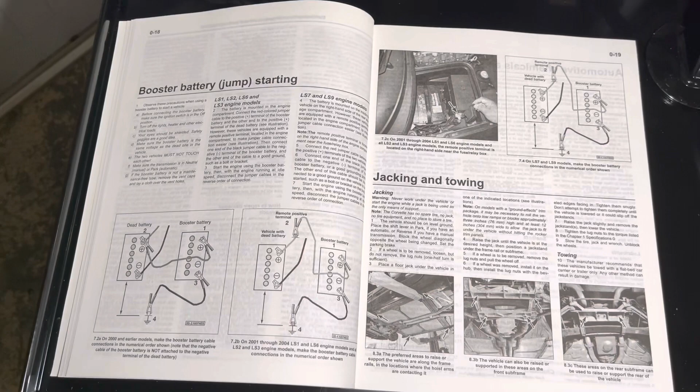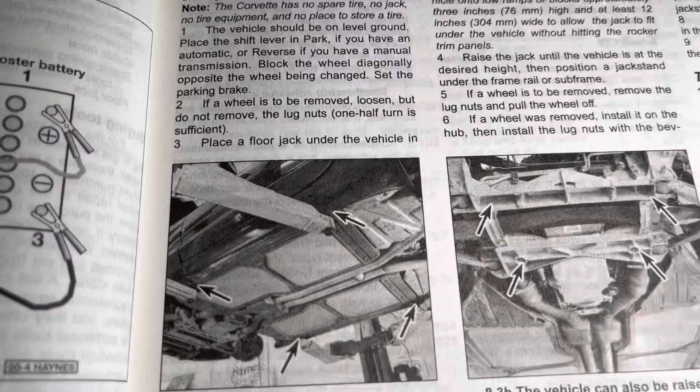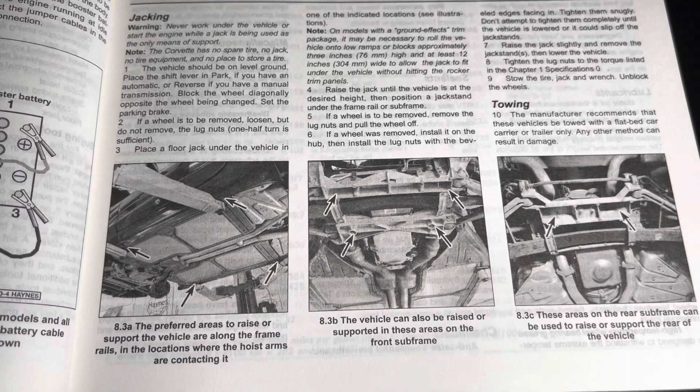The manual is very helpful for exact points like this. On Corvettes, C5 and newer especially, they have specific jacking points. As you can see, you can only really jack where those arms are on those 4 points or on the subframe, front or rear subframe, in specific points. Normally when you take it places, they end up messing up the bottom of the car, and we'll get down there and show you exactly what happens. It's not on our car, but we'll show you the area that can get damaged.

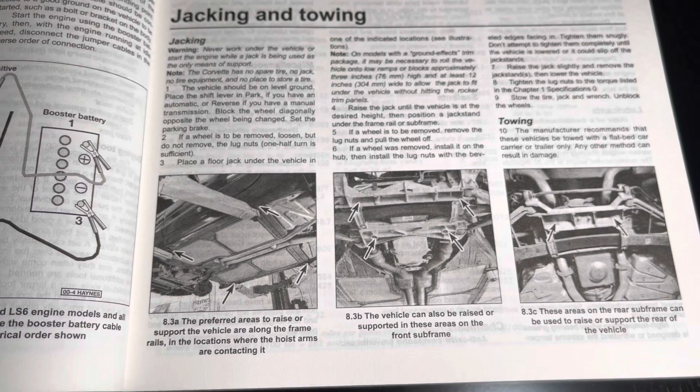Corvettes sit low to the ground, so the first item is a book to tell you how to jack it up and whatever maintenance you need to do. The very next one is going to be some type of a low-profile jack.

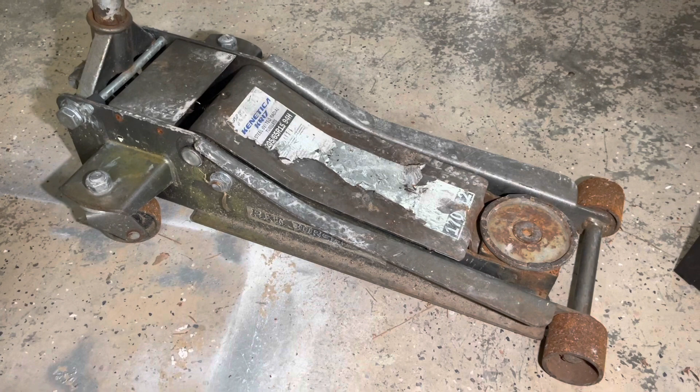This is just a cheap Harbor Freight one. This car weighs about 3,000 pounds, a little over 3,000 pounds. So if you get a 2-ton jack, you'll be fine. Anything 2-ton or more, it's got to be a low profile, and that'll help you get up underneath the car.

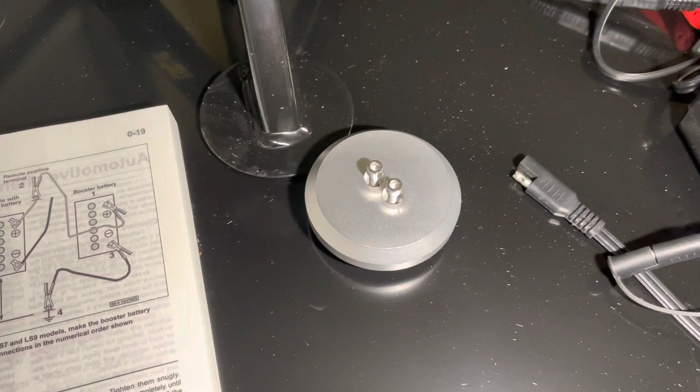The very next item that we're going to be looking at are these jacking pucks. Now the Corvette is a molded tub frame design, and underneath it does have some steel where you can jack up with the jack, but that's the damage area that a lot of people damage.

So they sell these pucks. These ones are aluminum and they stay in the vehicle. They sell rubber ones too. The reason we chose these ones is so you can lock it in and leave them on the car. The rubber ones you have to remove. So we'll get down there and show you the area where you can jack up.

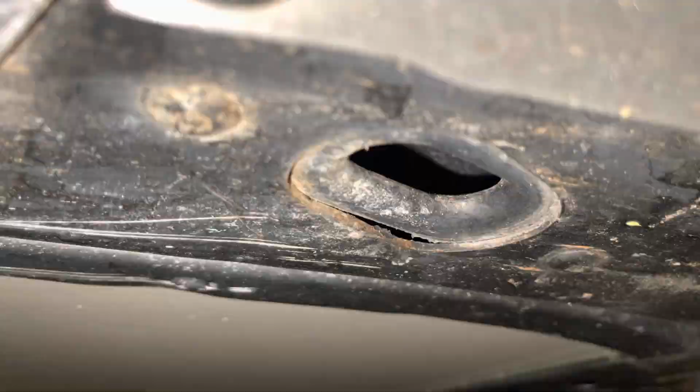All right, so we're on the passenger side of the Corvette. If you follow the door line where it opens all the way down to the bottom of the car, you will see a small hole right there. Now that hole area, you can put a jack there and it's steel, but with these, you would just simply...

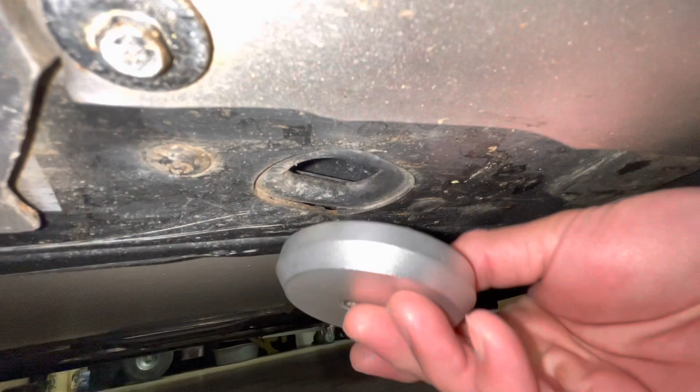Sorry, it's hard to do on camera. Put it in there, rotate it, and now you see that puck is on there, and then the screws would draw it up. That stays there the whole time. And they have colors to match all the paints, so this one's silver. So we're going to install these and leave them on there. And that protects the finish under the car, because people will throw a jack under there and end up cracking the fiberglass. It's just no good for the car when you do that. So jacking pucks are definitely essential because these are the only spots you can jack these cars from.

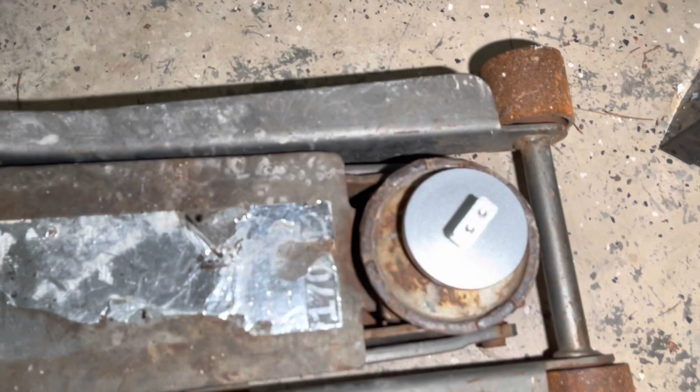This moves us into our fourth item, which are going to be jack stands. So we have the book for the first item, the low profile jack for the second item, these jacking pucks for the third item. So these jacking pucks, they sit perfectly inside of the jack itself. We'll show you here—they'll sit right in there and they'll catch on all the lips there.

Also on the jacks themselves, we do have a video on this Daytona jack on the left. If you want to see that, click the link above.

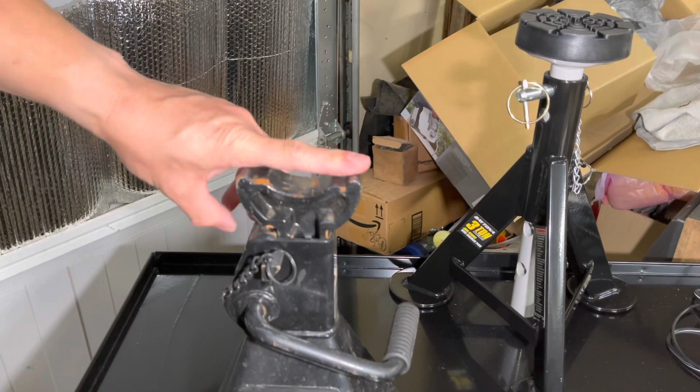On the right is also a set of Daytona jacks, but as you can see, they have a circular pad there. This is not going to be ideal for your Corvette, this jack over here. It'll rest on the steel under there, but you have a groove, so you're only really getting these two points. If you set this up, there's a little bit of play left and right, so we don't like these ones for Corvettes. For any other vehicle, they're fine. But for the Corvette, you're gonna want some type of flat mounting surface area, and this thing offers tons of adjustability.

It's robust, and if you see here, the jacking pad fits right on there, so it'll sit nice on there. If you don't have jacking pads and just get these, this will also sit nice under the Corvette. So either way, you have that. But for added security, these pucks happen to fit perfectly inside of the top of the Harbor Freight jack. No movement, it is locked in. So we have a set of four of these jack stands now, confident to do work on the Corvette with these.

So now we can get the car up in the air, we can do maintenance on it without damaging it.

The very last thing we're gonna be looking at now is a battery tender. We have a battery tender here because if you don't daily drive this Corvette, the battery will die. Most people who have these cars don't normally daily them, they're weekend cruisers, so even if you're driving it once a week, it'll still be good. But if you let this thing sit for more than a week, the battery's gonna die, and then you're gonna have problems with the TPMS sensors for the tires, the keyless entries and all that stuff.